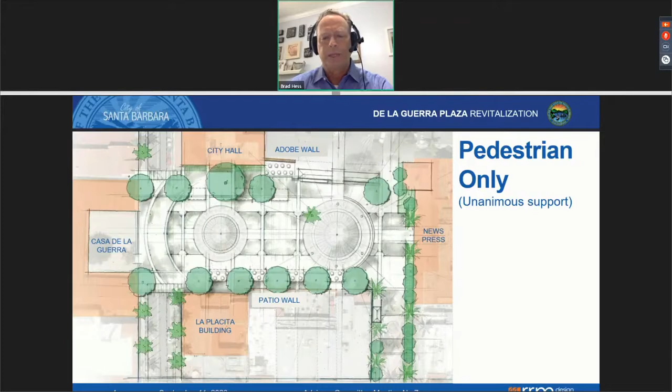Just want to remind us all that it was a unanimous decision by this committee to make the plaza proper pedestrian only. Parking, as we referenced, is something we just don't have enough information on, and the right of way will remain.

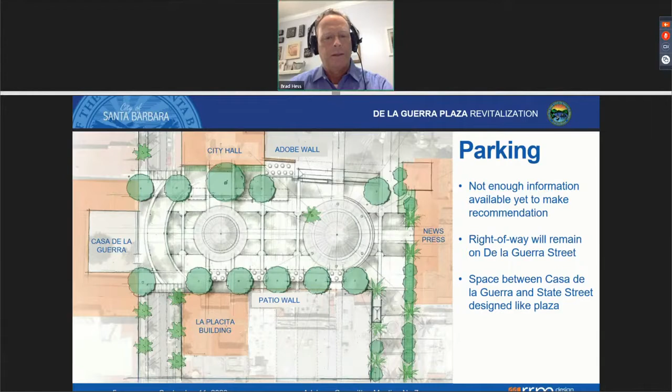And here, I'm going to turn it over to Lief to begin talking about the other topics. Excellent, good morning everyone, good to see you all. I'm going to run through some more recap slides. As Brad mentioned, we're really here to touch base, make sure we're all in agreement, that we're all rowing in the same direction. So the arcade—we talked at length last time, you can see it highlighted there. It received pretty much unanimous support from the committee, and it's going to be a really valuable feature for its historic, cultural, social value. That'll get developed a lot more during the city's review process.

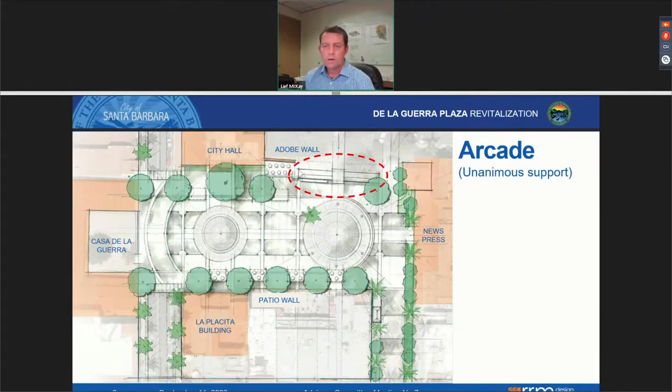The trash we talked about at our last meeting, the takeaway was the committee couldn't really evaluate locations because there were too many unknowns in terms of the need and the demand.

So since then, Brad worked with Dan Rao to work through this calculator, which looks at all the business types around the plaza and spits out numbers at the bottom of how much volume we need to account for.

That theoretically would get rid of all the wheelie bins you see clustered along the edges of the plaza. There's a lot of numbers there, but the red arrow points at the bottom line. The analysis says to take care of today's demand, you need two cubic yard bins and four cubic yard bins.

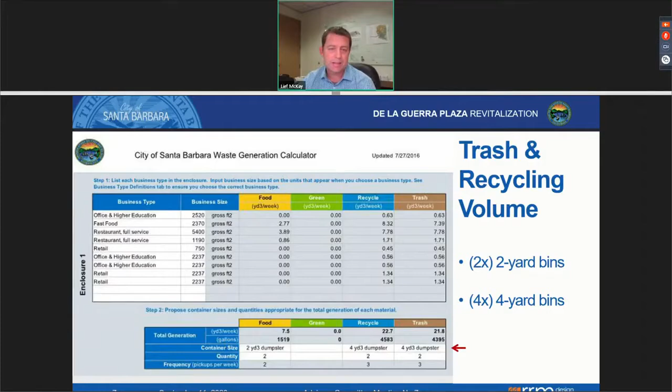So pretty decent amount of trash, but we really believe consolidating it into a single pickup point is critical to meeting many of our goals for a clean, sanitary, pleasant smelling space, which is important to all the vitality. No one wants to hang out surrounded by trash.

So Brad has spent some time talking to users, property management, MarBorg, and he and I walked the site as well, looking for where we could tuck the trash. And we have two locations to share with you today.

The one on the bottom right there, this idea is to put it against the blank wall in the placita, in line with where the restrooms are slated to go. That could be just an attractive above-grade structure.

It's just around the corner for all the restaurant service businesses, and instead of needing to get a trash truck into the plaza, you could roll it out to State Street, and that's how you could service it.

Secondly, a little more interestingly, we want to share an idea, or bring back an idea we briefly brought up in a previous meeting, about an innovative underground collection point in the street on De La Guerra.

It's exciting to us because the visual impact of dumpsters is really problematic, and it doesn't take space away from the users.

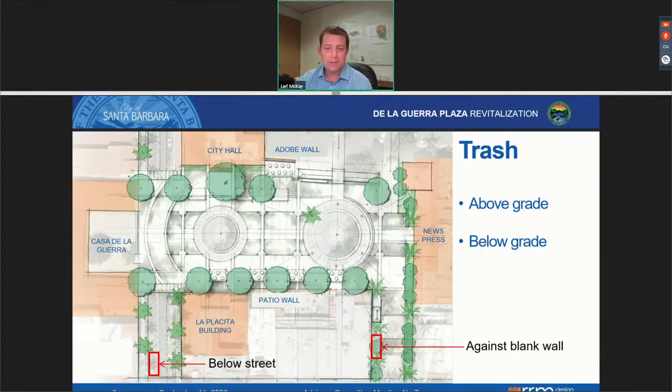So that is essentially the concept we want to propose to you today. Lots more thought needed to figure out the nuts and bolts of it. But Brad, do you want to interject anything on that topic?

So the concept here is that whether this is on De La Guerra Street or in the Placita, because it could be both, is that we would have the bins down below, and if it's a recycling day, everything comes up above ground.

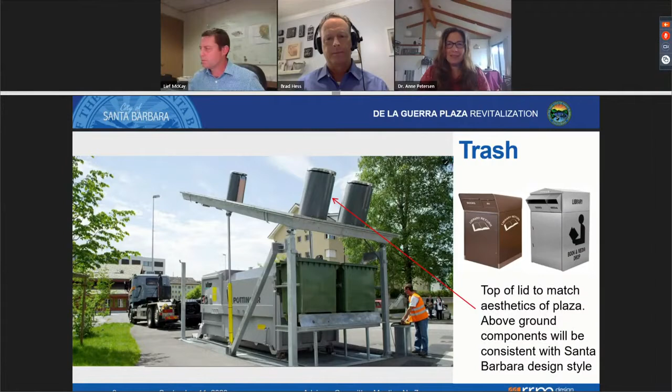Any other questions before we move on from the committee? Okay, Lief, it's all yours. Okay, we can come back to that if anything else comes to mind.

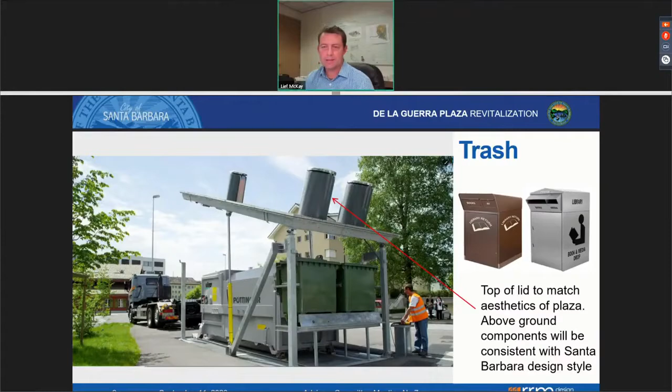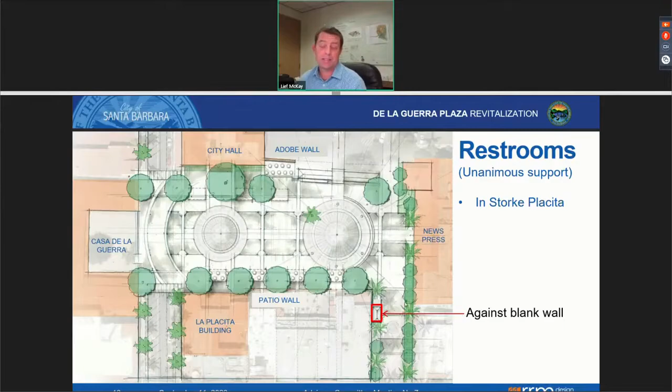And if I could just chime in here, one of the things that will be really important is the design of these. Right now, we want to make sure the concept is about location, function, operations - does it fit within the vitalities? Then aesthetically, the design portion of this will follow. It's clearly going to need to look like Santa Barbara and fit into the space. So rather than going through a design process with RRM and having them spend time and money on that, we really want to address the issue first before we get back into the design. Just want to make sure that's clear.

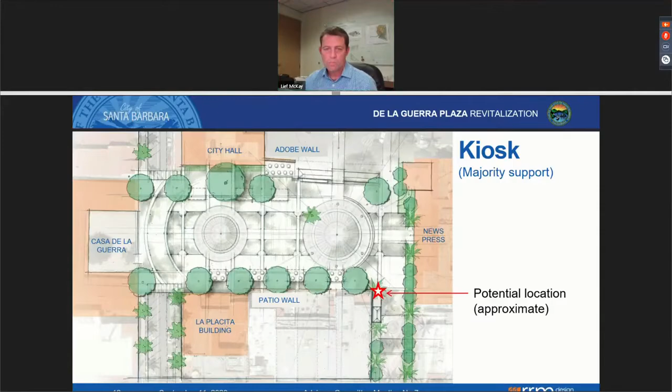Splash pad. Brad and I were joking yesterday, this is a good week to talk about a splash pad. After the weekend we just had.

And this has been identified right in the heart of the plaza at one end. It really bookends one end of the plaza. You can see the arcade, the middle of the arcade would have an archway in it that would frame the view from that entry. It would be centered on the long north-south axis. And the idea is it really activates the back of the plaza. It's a reason to pull people in on a day that there's no programmed activities in the plaza, like the photo at the top left.

The photo on the bottom left shows design intent that when you turn it off, it's completely flat. There's no nozzles above ground, so it's truly flexible plaza space whenever it needs to be.

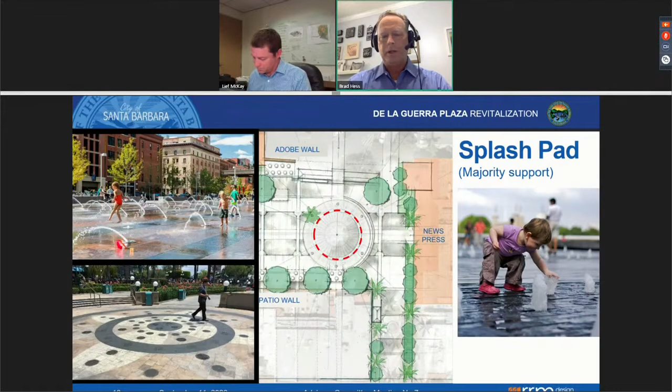So this has been in the plan for several meetings, but we just wanted to make sure we're all on the same page with this concept still, so we can come back to that. And Lief, if I could just reemphasize that we really want direction on this today. Part of the design of this will be a total reflection of the utility plan and the materials choices that we talk about next meeting. So having a confirmation as to whether this is a concept that we feel fits within this plaza will be really important today. Thanks.

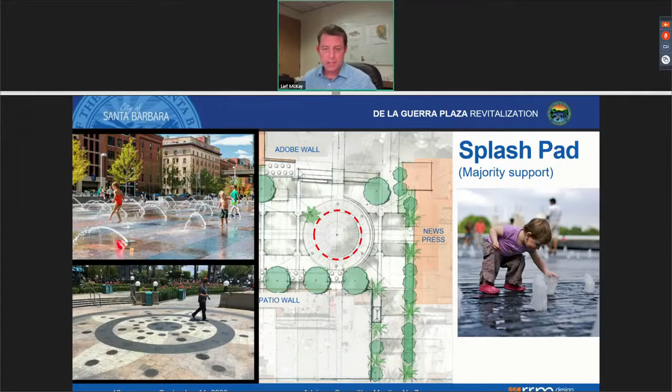And then we want to introduce a couple more design elements today preliminarily for the committee to discuss. The first is shade. We've had this vision of making the edges green and shady and keeping the middle quite open, because we know human behavior, people gravitate to edges anyway. So we feel like the edge along the cafe courtyards along the western side is really going to be where a lot of the activity happens on a daily basis.

But by the time those trees get to the size we've shown them, we'll all be a lot older. So we've looked at some ideas for introducing shade canopies, shade structures to supplement the tree canopy until it gets more established and create little outdoor rooms, if you will, along the edge, generally in those locations that we've shown them.

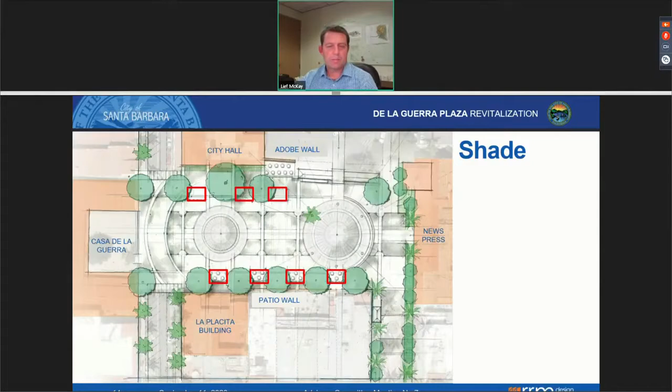So we've kind of been looking at an idea like this, which is almost like a cross between a shade structure and an umbrella. It's very visually light and unobtrusive, which is a real concern with all the historic, magnificent architecture you have in every direction. It's hard to plan for adding structures in there that aren't going to distract and impact those negatively. So an idea like this we feel has some merit.

It's retractable. That's a big plus. So on winter days, they can just be tucked away like the photo you see on the right. They're on a pivot, so you can adjust the angles. But it creates little zones, informal rooms, so that people could gather under one or another. This photo shows it sort of just sitting on the ground. We would look for more of a permanent mounting system, so it was cleaner on the base. But that's the direction we're heading with that.

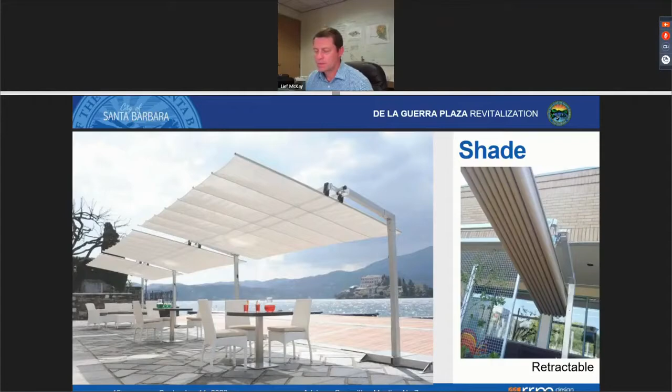Okay, lighting is the next element we want to start discussing. Really, the lighting needs to serve multiple purposes. It needs to provide a sense of security and safety for users in the evening. It also needs to provide a mood and an ambience, reinforce the architecture and the forms, and make it a pleasant space.

No one wants to hang out in a floodlit plaza, but you do want to feel like there's no deep shadows in the corners that someone could loiter in. So what we've got is basically a storyboard of different types of lighting that we'd like the committee to talk about. You see on the right-hand side, that's what is there today, and those light poles are also in the surrounding precinct, as you're aware, and they currently go around the horseshoe.

So something akin to that is certainly a possibility. There are also many other ways of illuminating public spaces that are very pleasing and effective. Top left is a series of uplights that really use reflected light to create the ambience - so that's uplighting all the trees. You can do different types of historic fixtures, like the one in the middle and the top. Bottom left is overhead twinkle lights to help create almost like a ceiling that you might see in many commercial patio type spaces.

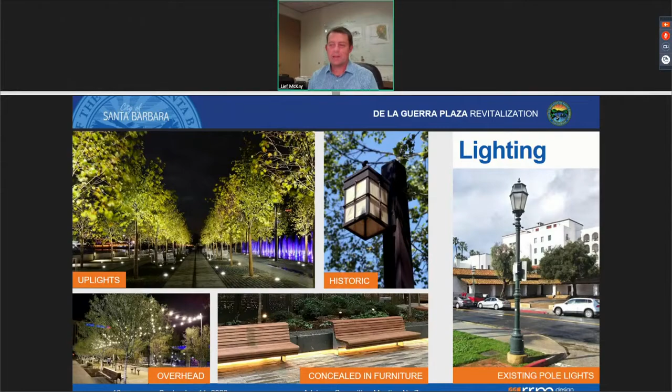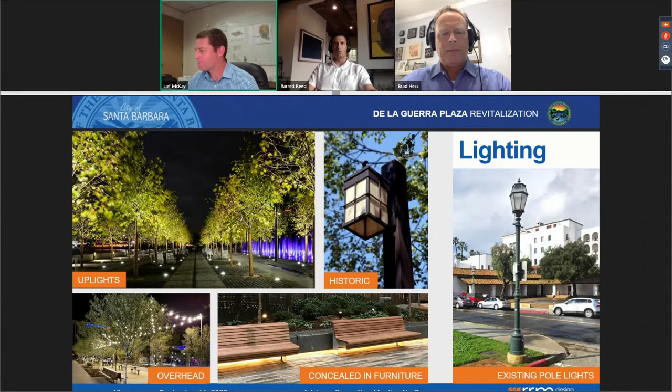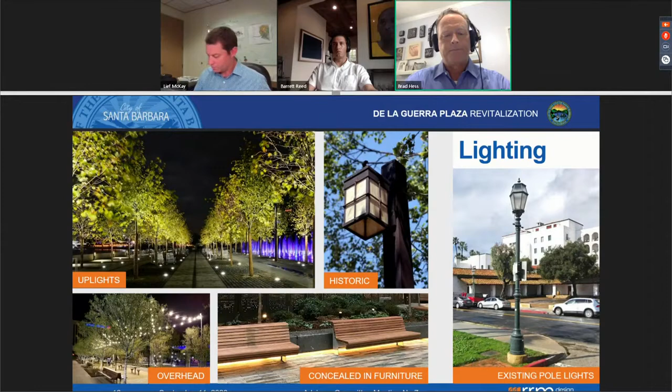Yeah, I'm not sure, Mr. Reed. We have a number of different property owners, as you know, surrounding the plaza. The goal, of course, would be to showcase those buildings, so hopefully it would be agreed upon and acceptable. As far as the process, though, I think it would probably be part of both an in-person and private discussion as well as a public review, just because it's going to be part of the public process to get it all approved.

Not a great answer, I'm sorry. No, thank you.

The challenge with lighting and shade is that lighting provides a wonderful ambiance during the evening, but we have to pay attention to what that same lighting looks like during the day. If it's ugly, if it looks like strings across or down a particular lane, is that going to detract from what we're trying to accomplish, which is either retaining views or highlighting buildings? If we've got a bunch of strings in the way, it looks more like a utility line than anything else. We want to avoid that too. So it's going to be really important for us to think both ambiance, safety, as well as aesthetics during the daytime.

Vice Chair Wiscombe: Thank you, Chair Snedden. My question is, have you analyzed the lighting of the buildings surrounding the plaza and reached any conclusions in terms of any types of lighting that might work well, be compatible with the existing lighting at the buildings?

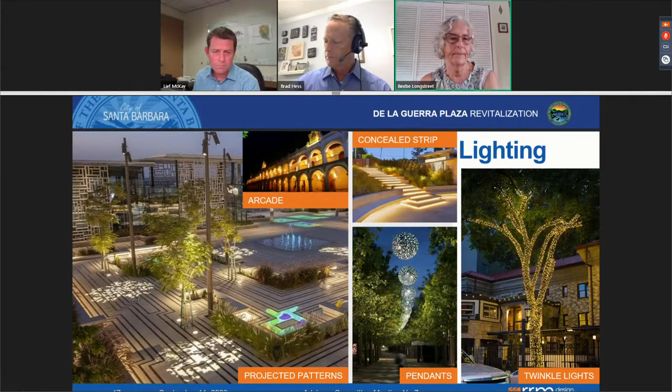And I think the different features being highlighted in different appropriate ways. I guess I'm least impressed by the string lights and the hanging lights. Those seem to me to go with an event, not a permanent fixture at dependable lighting. So.

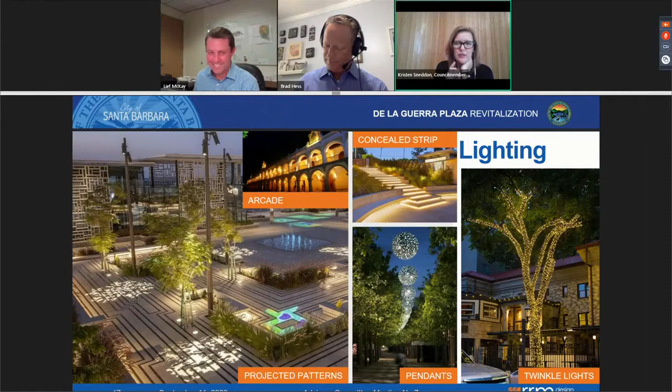Excuse me, Madam Chair. Yes, is that Commissioner Drury? This is finally Commissioner Drury, yes. Welcome, I apologize for being so tardy. Welcome, and just as a reminder, these are questions at this time. We had some comments there from Ms. Longstreet.

Well, I just wanted to suggest that there is an El Pueblo Viejo lighting program, and we should certainly have that folded into whatever program is being put forward by this committee.

Absolutely, thank you. Thank you. I apologize for being so late. Oh, we're happy you made it. Me too.

May I interject? Yes, is that Commissioner Perry? Yes, yes, go ahead please. Mr. Drury, thank you for that last comment, it's kind of in line with where I'm going.

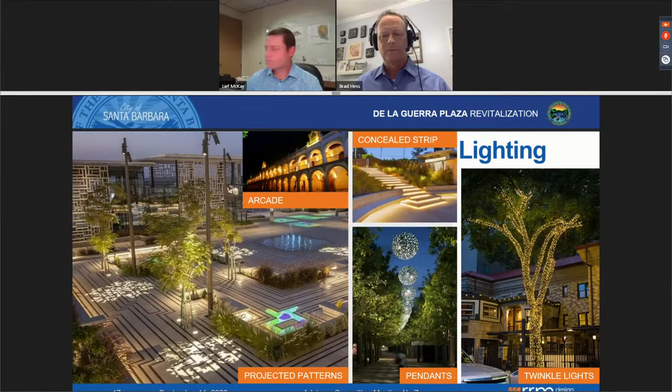The historic lights, I don't know how historic they truly are. I know they were there in the 60s, I'm guessing they may have gone back to the 20s. The historic perspective I'm most interested in preserving is the sense of the village of Santa Barbara that started in that exact area, so we don't lose our roots and beginning. Casa de la Guerra was the center of social life of Santa Barbara, with the Pueblo building up around it. Taking the grass away and going with hardscape is a big step away from that historic perspective. I see the necessity behind it, but I just want us to try and hold on to some of that.

Thank you, Commissioner Perry, we'll have the full discussion of that. Very good points. Moving on, I think we can, yes. Okay.

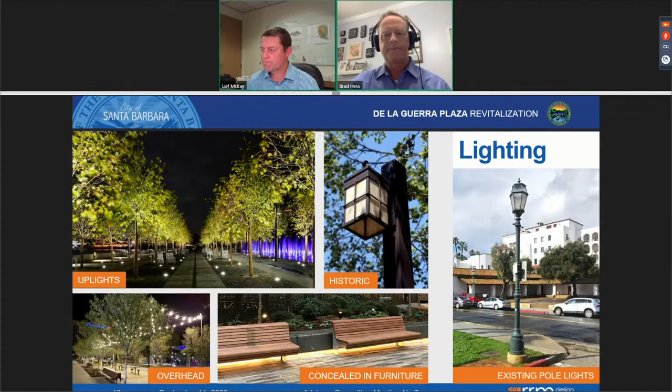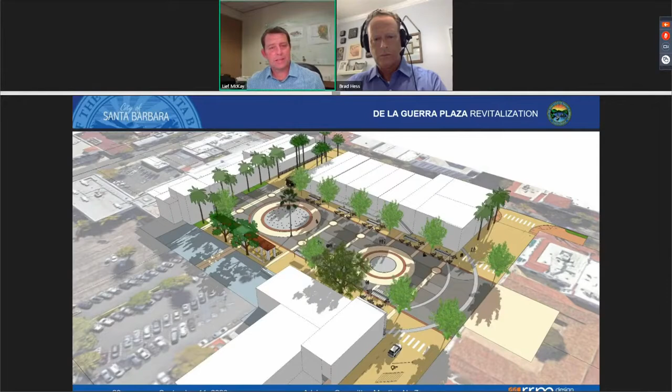It's still schematic, you can see the landscaping isn't very developed at all. Some of these things just show what's there today, like the existing palm tree, the existing pepper tree, and then just the concept of the green edges.

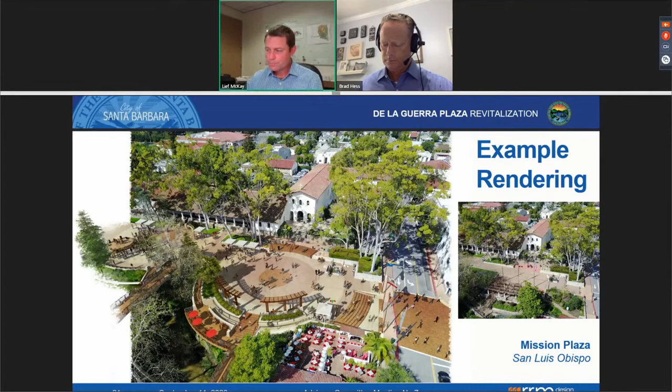So that's just a little teaser for the committee to show what we've been doing and how it's developing in the background. We'll all have the benefit of being able to go into the spaces to get a feel for the human scale of everything. Brad, do you want to take over?

Thanks, Leif. So again, I just want to reiterate the goals that today we're trying to really get confirmation on a number of these things. November 20th, we'll come back to you with a utility plan and a more developed landscape plan, as well as materials that would be associated with those areas.

We're hoping that with all of these confirmations along the way, by the end of December we will have a final concept for you to review and hopefully approve, with the caveat that if we need an extra meeting, we can certainly take the extra meetings. I think we all work well under having a goal, and today is our 7th meeting, so this would be a total of 9 meetings to create this concept. If that doesn't happen, that's okay, but I want to make sure we're all trying, because we've got good momentum going right now, and I want to keep it going.

Madam Chair. Thank you, Brad. Mr. Hess, excuse me, sorry.

I think it's really important that we hear from each committee member confirmation on the arcade, restrooms, kiosks, trash enclosure, splash pad, and then also have a full discussion on the shade and lighting concepts. As we go through different commissioners, if you could comment on those items, we've had some valuable comments already about tying into the village of Santa Barbara and the historic structures, and about lighting of the buildings and the arcades.

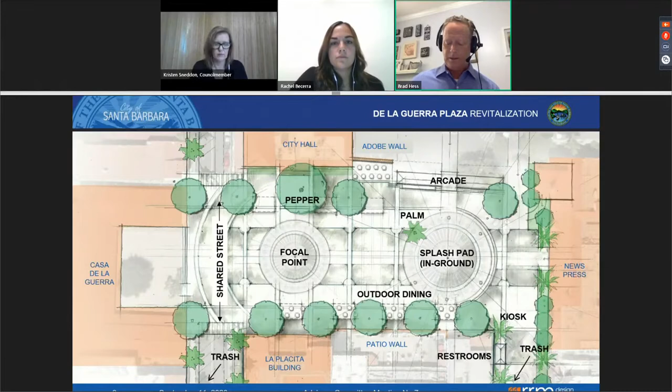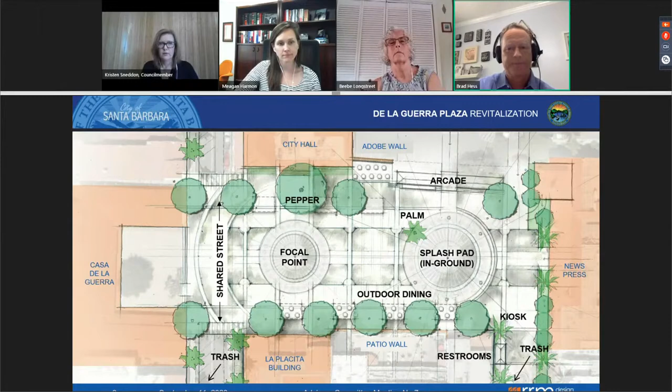Thank you, Mr. Reed. And I think on the stormwater, Mr. Hess might have some comments on that. The ground under here doesn't percolate, but we'll get to that next meeting, very specifically when we talk about the ground materials. Is that correct, Mr. Hess? That's correct. And actually, I will reach out to Mr. Reed and explain exactly where we are, just so that he understands the details that we've gone through at this point. Great, thank you. And really appreciate the other comments as well.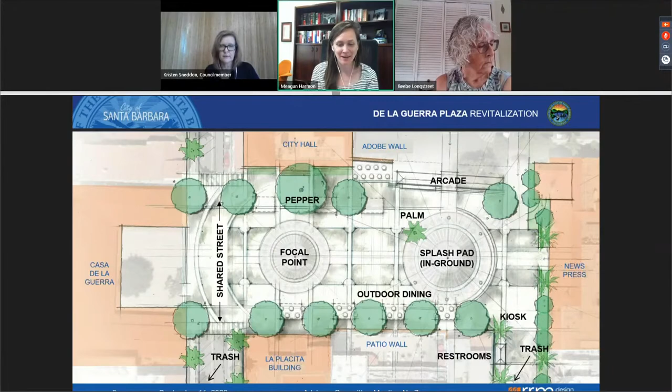And Councilmember Harmon. Thank you, Madam Chair. I'm going to keep my comments pretty brief. I'm in pretty much lockstep with Mr. Reed on many of the things that he said, as well as both of you who went before. I love hearing all of this agreement and excitement. The arcade, I also just love.

I mean, that's one thing that really stuck out to me through this presentation. And I love Mr. Reed's framing of it as a future historic resource for our city. And I really see that way too. So I'm very excited about that.

I'm also, I couldn't be more strongly in favor of the splash pad. Really love that. This is going to be a center, if we are to move forward with it, if we are to find a way to make it work, I really could envision this becoming a center for families, both people that, from other parts of town that come to State Street, and for the families that live downtown. It just, to me, feels so much like something we're really missing. And it fulfills such a need for the community. So I really love it, and I'm so excited about it, I have to say.

On the kiosk, agree. I really like the location. I think it's perfectly appropriate. I am in favor personally of kiosks. I like what it does, but have heard many of my colleagues on this committee through the course of meetings that there's potential for it to go wrong, or to not be effective, or to not do what we want it to do. So I really like the idea of some flexibility with that. And I think that could be a great solution, and allow us to try something out, and if it doesn't work, to move forward in a different direction.

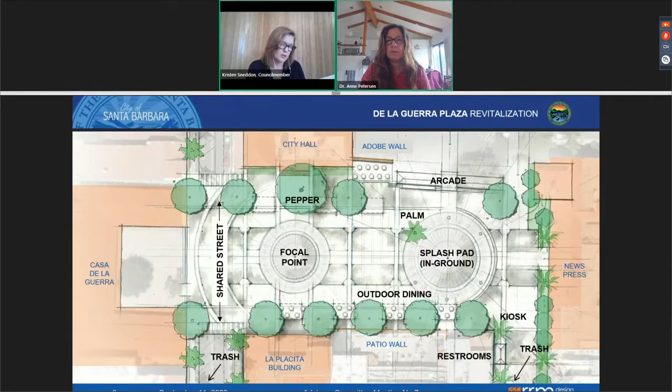That's very helpful, thank you. Have we heard final comments from Commissioner Perry and Dr. Petersen, please? Thank you. A few comments, I'm happy to listen to the discussion.

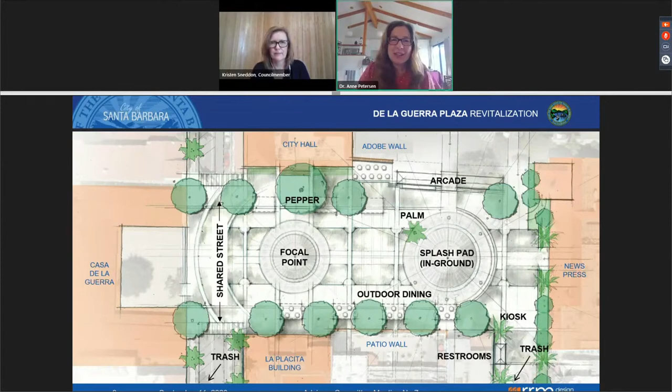I do agree with most of it. I'm not as familiar with splash pads, I hope to learn more about it as we go along. From the layout we've received, it's enormous and such a huge feature, but I think I understand it won't be on all the time, so it still will provide for flexible use of the area. I also wanted to ask about the environmental sustainability of that, since we've had so much trouble with drought and having to turn off public fountains, and we're also reluctant to use grass for that reason. So I'd like to hear more about how this water is recycled and conserved.

In terms of the shade canopies, I get it, they look like they're going away, but I wanted to make one small pitch. When I first looked at it, the structure for suspending those canopies looks so modern and just doesn't fit, and the canopies as well. But when I really looked at the canopy style, it does reference a 1920s shade structure used in El Paseo.

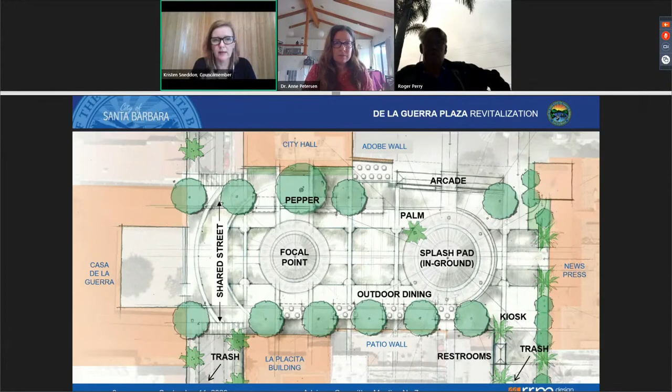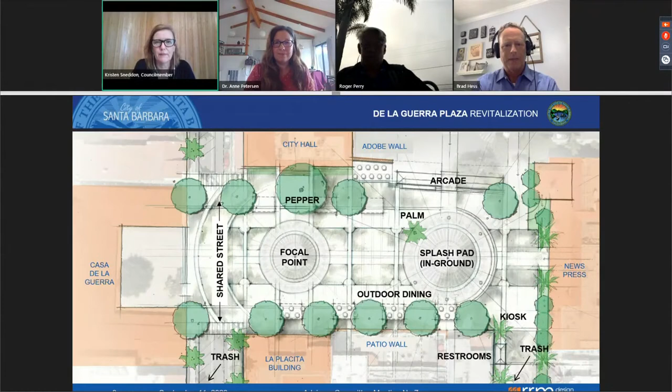Thank you so much for those comments. If I could ask that Mr. Hess reach out to you, I think we'd all be interested in seeing more options for shade structure or shading along there that tie back into historic references too. Thank you for that and the offer to share those. Yes, Madam Chair, I will reach out. Thank you, and Commissioner Perry.

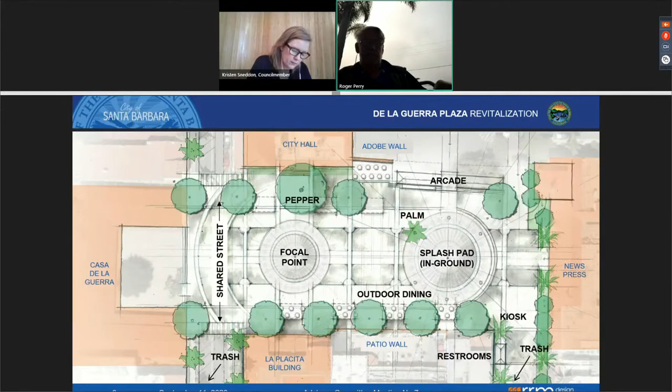Very short and sweet, I'm very impressed with the consistency of comments and concerns. I share it on the kiosk. I just as soon not take business from State Street. I don't like the idea of the shade cloths. Everything else is wonderful, and I just ask that we preserve a historic perspective as we're trying to.

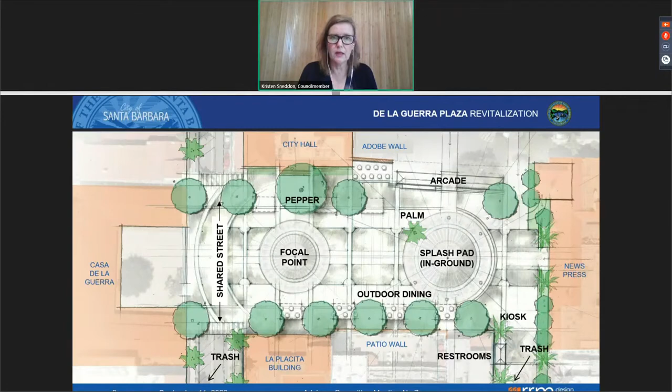Thank you, Mr. Perry. I think, have we heard from all commissioners present this meeting? I believe we have. Do you, Mr. Hess, have specific questions for direction from us?

Actually, before that, I wanted to add a few more comments. At the next meeting we're talking about landscaping, and I really would like to see a variety. I think variety is what makes Santa Barbara what it is in terms of greenery and trees. Maybe a little patch of green on the ground level around the bases of those trees, not hardscape going right up to the bases, would be nice.

And then I think we need some further input for the lighting. Once we see some more options—or do you feel you have enough to go on with our comments so far?

Madam Chair, I think we have a lot to go on, but when we come back at the next meeting, we'll want to refine based on what all the committee members have said. We'll refine the choices and options down, develop ideas a little better so we can get clearer direction next time. I think that'll be part of the landscape plan too, clearly.

It was mentioned that mature trees are very expensive, and depending on the tree, sometimes they don't take very well. So it's kind of a gamble sometimes, but I think we need to look into it.

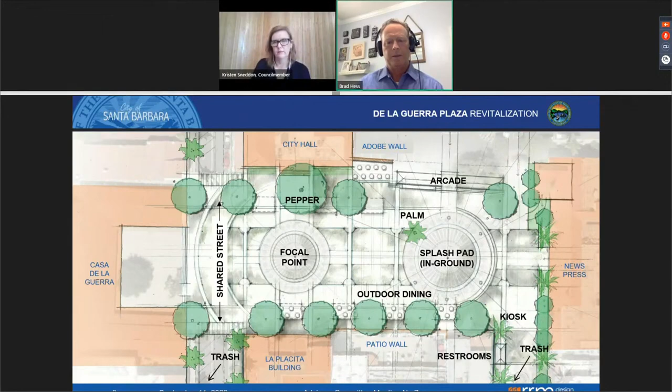You asked about process. As you noted, this is a concept plan. The formation of this committee was really about having a number of different perspectives from all of the different groups that oversee these projects. Our governing board is the Historic Landmarks Commission.

So we will be going through the process. Once we have this concept plan, everyone says, okay, it's going to change because it's going to go through the process, but this is a plan that we all agree with based on the purpose statement. It meets our expectations, it meets what we think the community needs, and takes all of those considerations into that design. Now it needs to go through the public process.

I think it does. Thank you for clarifying that. Yes. Okay, and Mr. Reed.

Yes, Chair Sneddon, I had a thought on the kiosk, and I think Councilmember Harmon maybe brought this up at an earlier meeting. Rather than an informational kiosk or a food and beverage kiosk, which would inevitably compete with the surrounding businesses, I'm thinking in terms of the landscape, maybe a lack of color in the plaza. If we considered that kiosk to be some type of floral stand, it could bring such warmth and charm to the plaza and to that location. It softens the restrooms, and it could be incredible. People love that at the farmers market, and it could just be something there on a daily basis. So just a consideration.

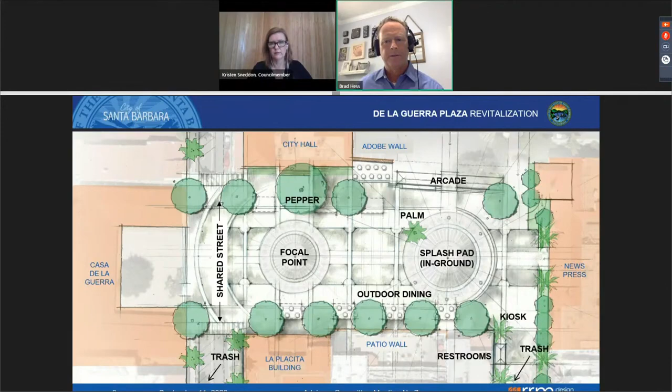Before doing that, I just want to again commend this committee. I really appreciate how thoughtful all of you are with each of these items. I think you understand the gravity of your role, which is huge. This is a really important project for this community, and it's exciting to work on. At the same time, there's some pressure. This is an important space, and we want to make sure we get it right. So thank you.

Thank you, Lee, for putting those up. November 20th, we really want to look at materials as well as coming back with some recommendations on some of the topics we've discussed today. We will have a utility plan and a more developed landscape plan. I know this was brought up by Mr. Perry outside of this meeting, but we received a preferred layout from Old Spanish Days that will be a reflection of the utility plan. So we're putting that together and trying to figure out what the best plan is for the utilities, as it relates to not just them, but for the plaza as a whole. So we'll be showing that as well.

And then December 18th, as we already talked about, hopefully, fingers crossed, our final meeting. So thank you, thank you so much, Mr. Hess, and thank you for your work.